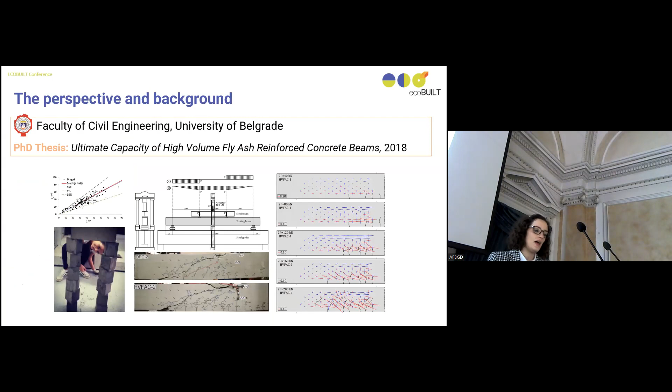Hello everybody, thank you for inviting me to this conference. I'm glad that I will have a chance to discuss this eco-building problem from a different perspective from all of you. As you've heard, I'm an assistant professor in concrete structures. So most of my work is dedicated toward research of the alternatives to traditional concretes on one part, and from another side, I'm also a designer of traditional concrete structures. So that's the perspective from which I will be speaking today.

Construction industry is under great pressure to reduce its environmental effect, and it's accounted for approximately 40% of total climate change impact. That is mostly due to a large consumption of energy and raw materials needed for its processes, but also due to the production of great amounts of carbon dioxide emissions and emissions of other greenhouse gases, and also the generation of large quantities of waste.

If you look at the CO2 emissions for, for example, one building, they come from all the stages of that building's life. So we calculate the total CO2 emissions from the production of all raw materials needed for building that structure, transport of those materials, the construction phase, the use of a building, and materials needed for maintenance, for repair, and other jobs, but also for the energy and water operations taking place in that object.

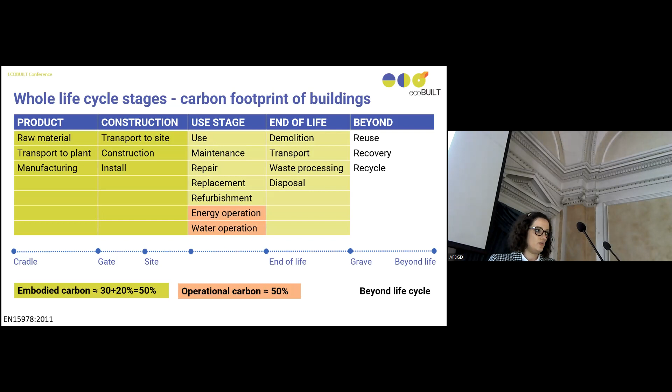So these CO2 emissions can be divided into embodied carbon, the carbon footprint associated with the production of materials, transport, and the production of those materials, and operational carbon, the carbon footprint associated with, for example, heating, cooling, or other energy and water operations in those buildings.

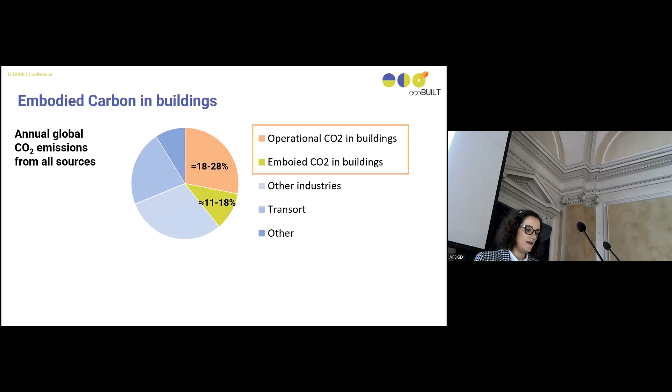So if we look at the global annual production of CO2 emissions from all sources, around 40% comes from the construction industry, and is divided into these two categories of carbon footprint.

If we look at the different sources and different types of objects, the distribution of this carbon footprint between operational and embodied CO2 is different. Those are some estimations, but the general trend is that innovation and changes being made in operational carbon footprint in the last couple of years are much faster compared to changes

being made in the production of materials. So we can assume that total CO2 associated with the construction industry can be equally divided between operational and embodied CO2 in buildings. This means the embodied CO2 part is really significant, mostly attributed to the production of structure or exterior and interior of buildings, with the largest part connected to the production of the structural part of a building.

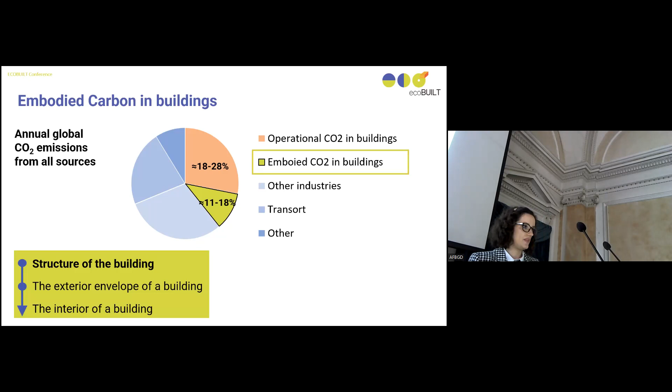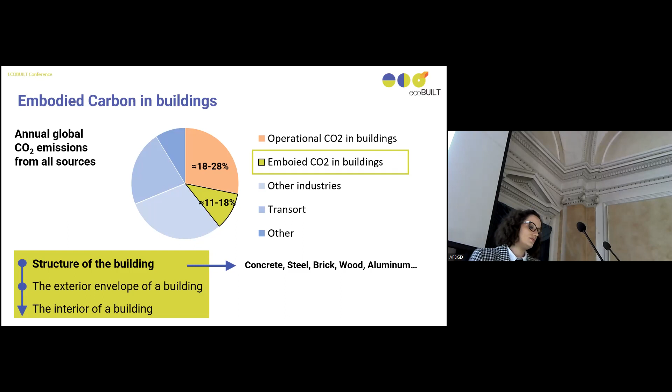When we talk about the structural part, we mostly think about commonly used construction materials like concrete, steel, aluminum, and so on. We can say without doubt that concrete is the most widely used construction material, so that's why the rest of this presentation will be dedicated toward concrete. But also, this is my field of expertise, so that's another reason.

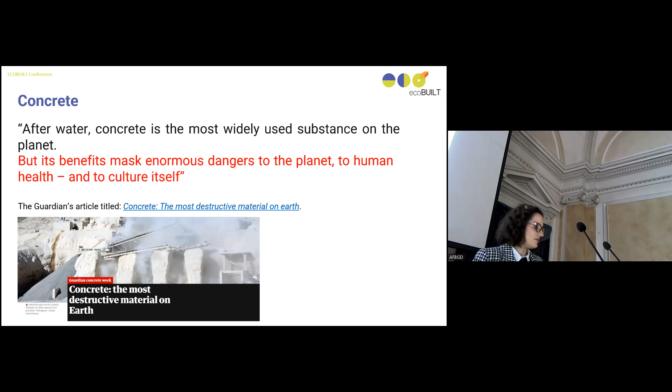You've probably heard that after water, concrete is the most widely used construction material on the planet, but its benefits mask an enormous danger to the planet, to human health, and to culture itself, as stated in a Guardian article and many other podcasts and media. This reflects the great pressure on the concrete industry to reduce its negative environmental effect.

But it wouldn't be fair to look at this negative effect without acknowledging that concrete is one of the main actors that actually enabled the human development we face today, the speed and extent of that development. So it's important to look at both benefits and recognize main problems so we can continue forward in a sustainable manner.

So what is the problem with concrete? The main problem is that it's being used in large quantities. There is probably not a single construction project on Earth today done without the use of concrete. But if we look around, concrete is now present in many other forms.

We are actually trying to produce concrete to build on Mars also. So as we can see, the future of concrete consumption will be even greater compared to today. This is really important because if we compare 1 cubic meter or 1 kilo of concrete to steel or aluminum, concrete wouldn't be the most dangerous one. For example, the production of aluminum is really energy and CO2 intensive.

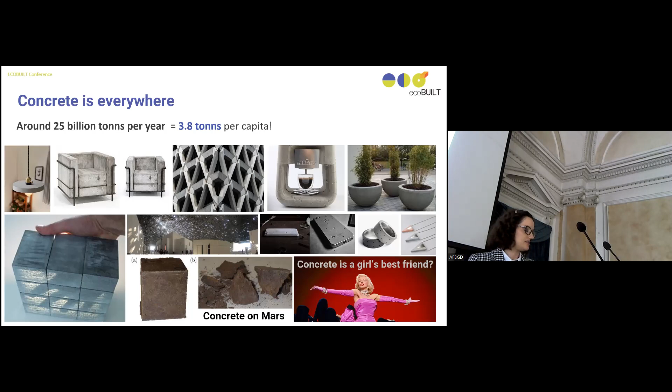But concrete is used in much greater amplitudes compared to those materials, and that is why its negative effects are really big. Aside from great consumption, maybe the main problems with concrete are the CO2 emissions that come mostly from cement, great use of natural resources like natural stone, and great quantities of waste generated after the end of life of buildings.

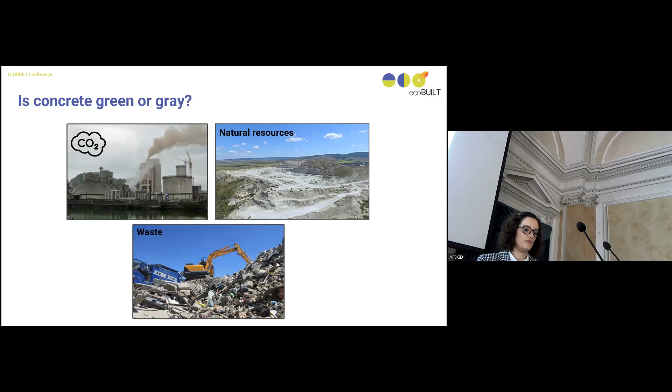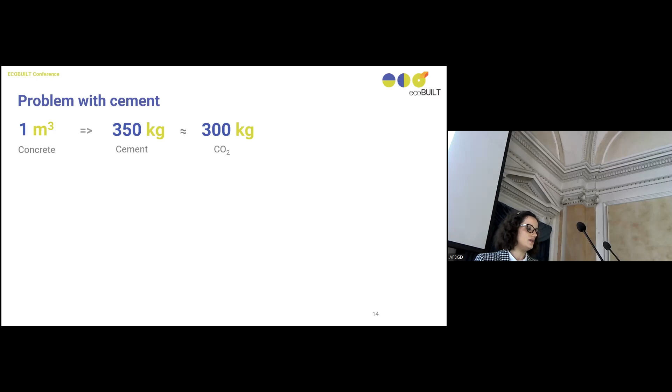The main problem with cement is that we can approximately say the production of 1 kilo of cement is equal to the production of 1 kilo of CO2. So cement production emits a large amount of CO2. For the production of 1 cubic meter of concrete, we need around 350 kilos of cement. So we can see that 1 cubic meter of concrete actually has a large CO2 impact.

And if we know there are large quantities of concrete used around the world, and that cement application is greater than the application of concrete - we use cement for soil stabilization, to produce different types of glues and mortars - it is no surprise that cement itself is responsible for around 10% of total CO2 emissions globally.

Where does the CO2 come from? If we look at this chart or scheme of cement production, we have two main issues. To produce cement, we need to heat limestone and other materials to produce Portland cement, the cement clinker. During that chemical reaction, heating at really high temperatures the calcium carbonate, we get cement clinker as a result, and we get CO2.

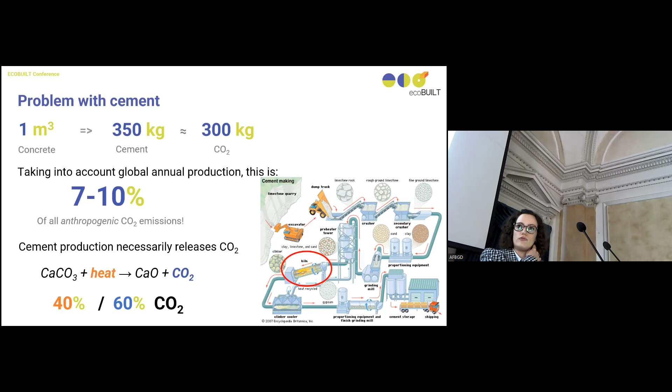This chemical reaction cannot, at least for now, be performed without CO2 being emitted into the atmosphere. It's estimated that around 40% of total CO2 emissions from cement come from the energy needed to heat the limestone, and 60% comes from the chemical reaction itself. This is a kiln, the part of the process where this chemical reaction takes place, which is why it's targeted as the critical point for reducing CO2 emissions.

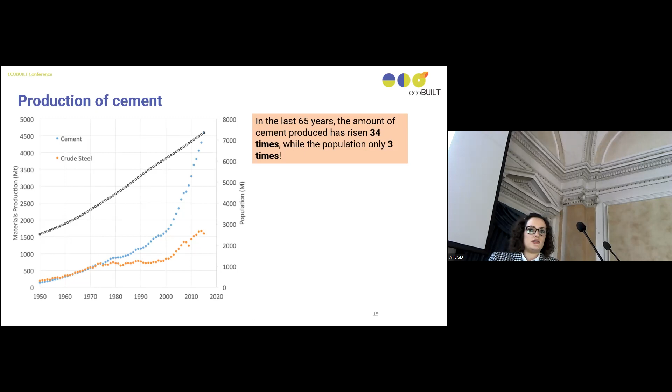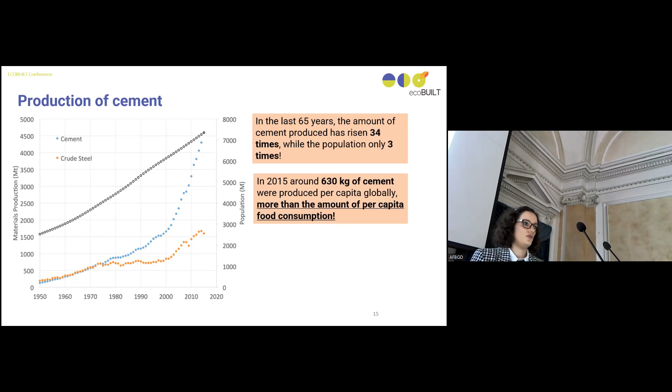Aside from this, cement production has been rising throughout the years, at a much faster rate compared to population growth. In the last 65 years, cement production has risen 34 times, around 10 times higher than the growth of the population on Earth. For example, in 2015, more kilos of cement per capita were produced globally than consumed food per capita that year. If we look at this growth, we can see it's exponential, and I'm afraid it's not going to change anytime soon.

So we have all this problem associated with cement. There are a lot of strategies being implemented to try to reduce this negative effect.

Some strategies are used to reduce the chemical part, and they are mostly oriented toward using less amount of cement, using cement in a more efficient way, or replacing cement with some other adequate material.

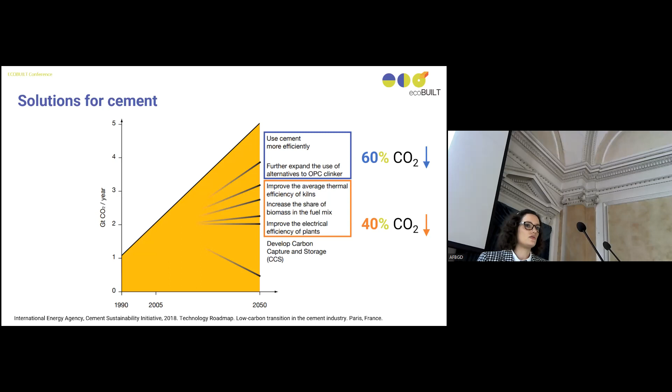Other actions are oriented toward making the process of cement production more energy efficient. One way to reduce the negative effect of cement production, which is relatively simple and relatively cheap, is to use so-called supplementary cementitious materials, mostly byproducts from different industries, to replace cement partially or totally in concrete.

The most commonly used materials are fly ash, a byproduct from thermal power plants, slag, a byproduct from steel production, or red mud, which comes from the production of aluminum.

These materials are used to partially replace cement in concrete, and they are actually part of the cement that we buy today. So when we say cement, it's not 100% Portland cement like it was when first introduced to the market, but now it has some percentages of these materials, with the idea to reduce the amount of cement being used.

Another way is to completely eliminate cement, which can be done in so-called alkali activated concrete or geopolymer concrete. This is basically concrete made from one or a combination of these materials, which can be activated not only by water, but by water in combination with alkaline solutions that have a really high pH.

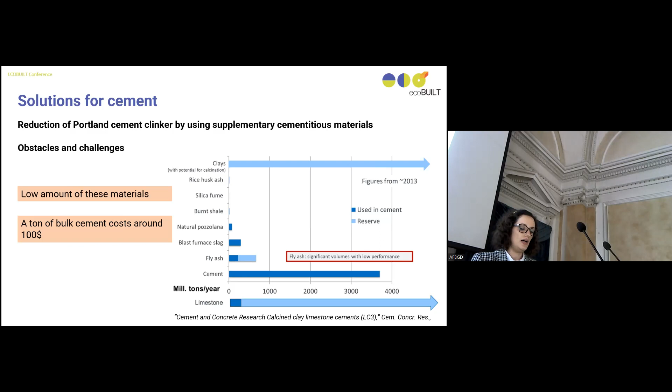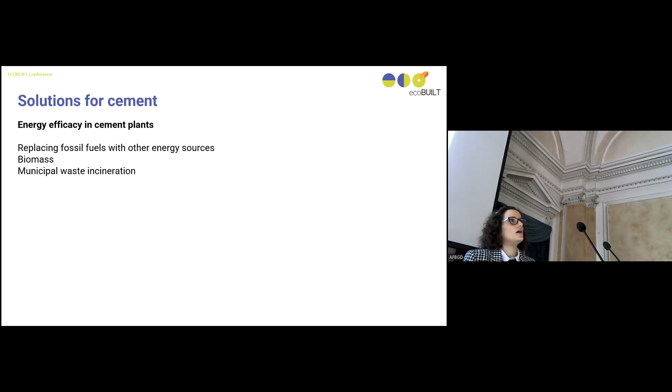Another way to reduce the negative effect of cement production on the environment is to reduce that 40% CO2 part. This is done by making the process of cement production more energy efficient, and by replacing fossil fuels with alternative energy sources. For example, in Serbia, most cement plants use incineration of municipal waste to replace part of the energy source in their production.

There is one popular technology now being researched and tested: CO2 capture and storage. The idea is to capture the CO2 where it emits in kilns, in this case of cement, to transform that CO2 from gas to liquid, for example, and then store it in containers or in another safe way, underground or underwater.

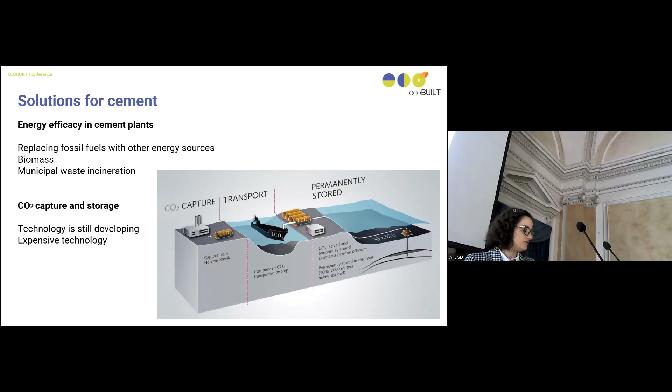This seems like an efficient way to eliminate CO2 from the atmosphere, but this technology is currently really expensive and energy intensive, so a lot of energy is needed to transform gas to liquid. There is still a lot of research needed for this technology to find its way into practice.

The second, let's say the biggest problem with concrete, is the large quantities of natural resources used for its production. Approximately three-quarters of concrete actually comes from stone, so large quantities of concrete need large quantities of stone.

That natural stone comes mostly from rivers, from riverbeds, or from quarries. And if we use that large quantity, there is a big problem with changing the environment and affecting the microclimate and biodiversity in those regions.

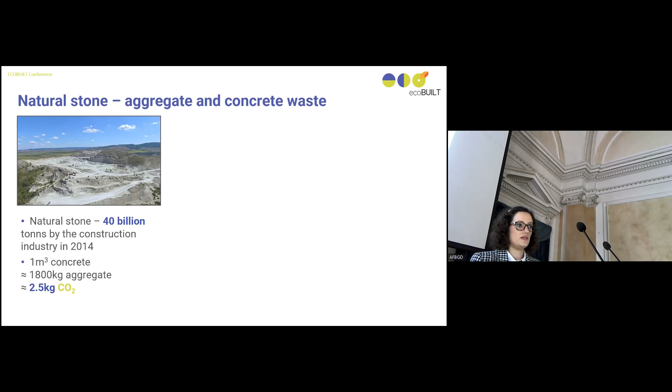One of the efficient ways to reduce the use of natural resources is the use of recycled ones. So it would be logical to use recycled concrete as a partial or total replacement for natural stone, especially since construction and demolition waste is around 30% of total waste, and concrete is half of that portion. These great quantities come from construction, maintenance, repair, and mostly demolition of buildings.

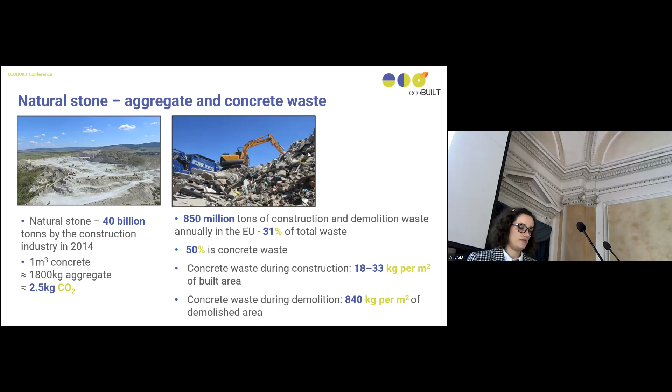Research and practice have already shown that it is possible to replace up to 100% of coarse aggregate in concrete with recycled concrete aggregate. This is being done moderately, in applications where some moderate properties are needed. So it's mostly used in construction of residential or commercial buildings, but also in layers of roads or other infrastructure objects.

So how does this grain of recycled concrete aggregate look like? As you can see, it's actually crushed concrete, and one grain of recycled concrete aggregate consists of part natural stone and part cement mortar. So it has different properties compared to natural stone, of course.

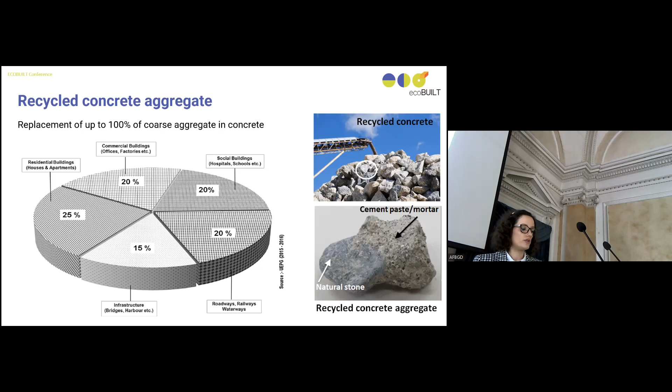It is inferior to natural stone. It has a lower modulus of elasticity, lower strength, higher porosity, creep, and shrinkage. But these inferiorities are not something that eliminates this material from practical use. It is only important to know all these properties so that recycled concrete aggregate can be adequately used.

What are some of the obstacles here? First of all, if we want to use recycled concrete aggregate, we need a place where we can buy it or obtain it. In many countries, there is a lack of recycling strategies and markets. In this figure, the gray bars show the percentage of recycling of concrete in different countries.

There are a lot of European or global strategies and initiatives that require recycling of some amount of waste, but they are not being followed in many countries. Aside from that, if we have a low price of natural stone, like we have here in Serbia, there is not enough motivation for investors to use recycled concrete aggregate, because recycling can be a really expensive process, and recycled concrete aggregate can have a higher price compared to natural stone.

So it is important to have state or local strategies that motivate the use of recycling, that give subventions to recycling companies in order to make an adequate market for it.

There are also some technical unknowns, but the codes and standards we have for design actually recognize recycled concrete aggregate and allow, explain, or define the use of that material in reinforced concrete structures. In some countries, these technical norms are not developed to an adequate extent for practice to use them easily. And like with any other recycled material, there is always a lack of trust in waste or recycled material. Places like this conference and similar events are a place to break that bad chain of lack of trust.

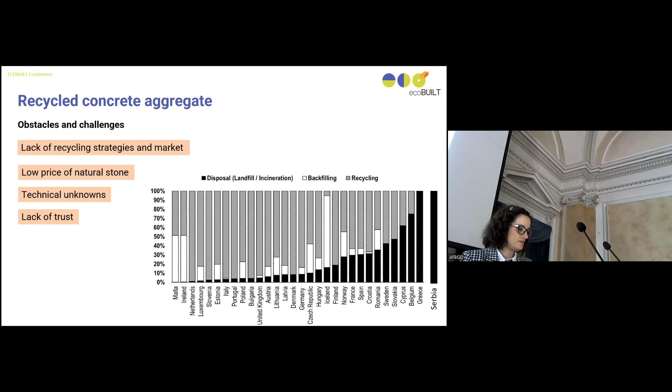At the end, one of the questions asked about concrete is: is it durable or not? It's important to know that we design concrete structures to have a certain service life. They are designed to last 50 or 100 years, depending on the type and importance of the structure. But that doesn't mean the structure will collapse after 50 or 100 years. It just means that in that period there won't be a need for great maintenance or repair, if the structure is maintained regularly and as it should be.

During that period, the formation of cracks is something that is normal. We design the width of those cracks and expect them to form in our structure during the service life. But if the structure is not maintained properly, then durability at that point can become a problem with concrete.

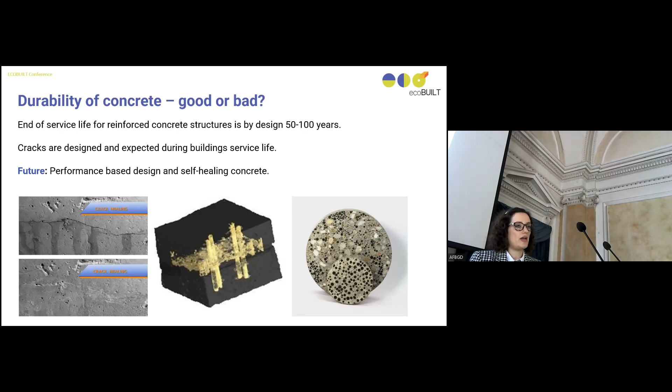Nevertheless, research is going forward, trying to find ways to make concrete even more durable, so that we reduce the amount of waste that will be made. We are now designing structures for specific performance needs, and we are developing self-healing concrete with some agents, some bacteria in concrete, that can actually repair those cracks after they form.

So aside from those strategies for making concrete more sustainable, we also try to optimize our structures, optimize by design, by using, for example, pre-stressing, by analyzing loads in a more detailed manner. So the idea is to use as less material as possible. We are trying to make our construction site or processes more efficient.

We use 3D printing technologies because 3D printing allows us to actually eliminate the formwork, and we can make really optimized shapes and structures if we use 3D printing.

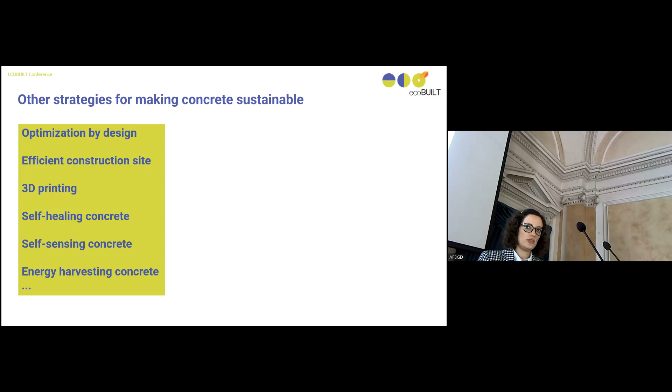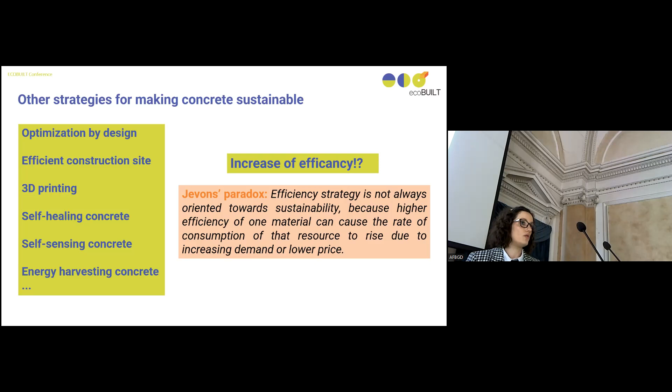We have self-healing or self-sensing concrete. So we are trying from different perspectives to make concrete as efficient as it can be, which is from one side a good strategy, but we should also be careful, because an efficiency strategy is not always oriented towards sustainability. And if we succeed in making concrete a really efficient material, then investors will use that material more, and maybe we will actually end up with a higher usage of concrete when it is more efficient.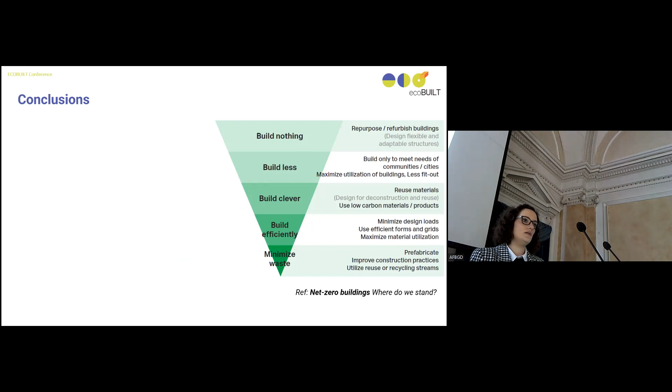Because of that, the real fundamental strategy that we need to apply to make concrete sustainable is actually to build nothing. So to try to use or repurpose the objects that we have, to build only to meet the needs of the communities, because there are a lot of examples in China, for example, a lot of cities that are made mostly of concrete and are completely abandoned, or a lot of structures that are not finished because of economic crisis or something like that. So we must admit that nowadays we don't build only for the needs of the community, but for some other purpose. So building efficiently and all these strategies that I told you about are something that we need to do at the end and not at the beginning of this sustainability journey.

So I think that for any material to be sustainable, we need to have fundamental knowledge about its properties and processes related to that material, so that we can actually make specific tailor-made strategies for each project, looking from the beginning of the project, from the design to beyond the end-of-life phase, in order to have a sustainable project and sustainable material. And in this manner, it is extremely important to have knowledge about systematic sustainability analysis for eco-evaluation, to avoid wrong conclusions, misleading results, or any other greenwashing that is present. And in order to do so, we need to adopt adequate methodology for this analysis.

For example, if we talk about concrete and we want to compare two different types of concrete, or a concrete structure to a structure made from a different material, we actually need to look at structures that have the same bearing capacity, the same serviceability, the same durability, and the same fire resistance for proper comparison. Only then can we actually choose the best solution for each project. Thank you for your attention.

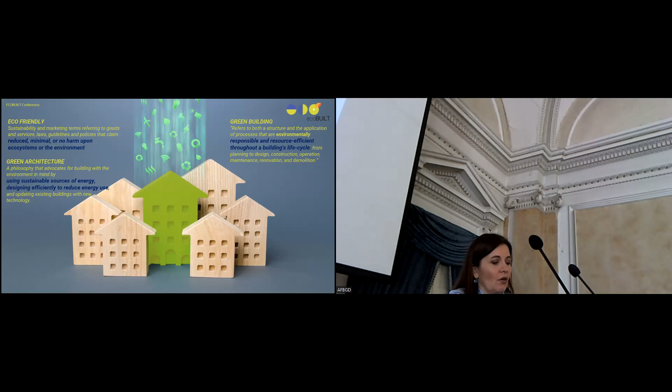If we go back to the definitions of eco-friendly, green architecture, green building, we will find several common points: no harm upon environment, using sustainable sources of energy, reduced energy use, and finally, resource efficiency through the whole life of the building.

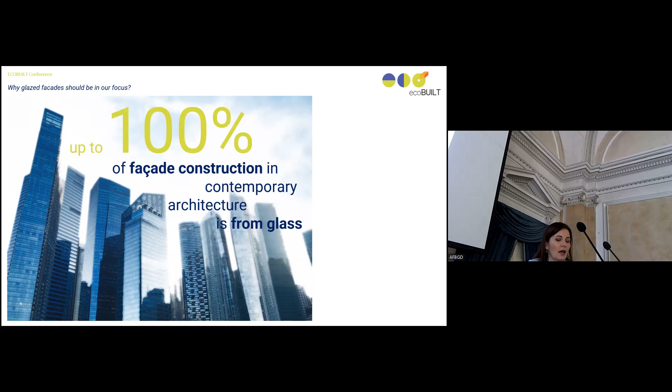Taking into consideration those points, why should glass facades be in focus for us? Because in contemporary architecture, up to 100% of facades are from glass or can be of glass. Why are buildings in our focus? Because 90% of the time we are spending in buildings. And additionally, up to 40% of all material and energy consumption is connected with buildings.

So what we, people who are designing the buildings, and as part of that designing the glass facades, should do, what should be our goals? Our goals should be to build 100% comfortable, safe, and energy efficient buildings, and at the same time with minimal possible use of materials or harm upon the environment. Taking into consideration all that is said before, we can conclude that glass facades have 100% important potential for green, ecological, and sustainable constructions.

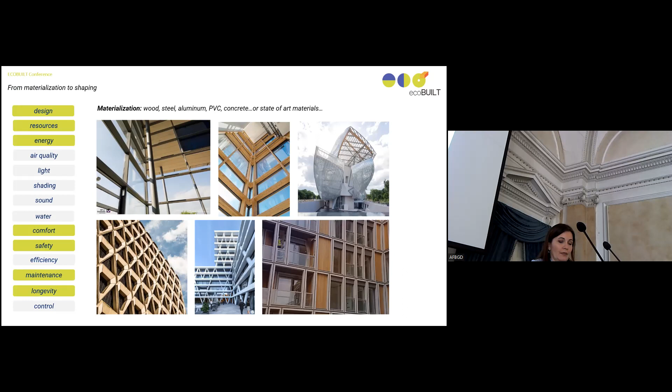The next step in designing the facade is definitely shaping. Shaping is something which can bring us a lot of tools for influencing important factors for sustainable construction. We can choose simple shapes or the most complicated parametric shapes, which of course will give us much more tools for influencing important factors. Let's go one step forward and think about greenery or greenhouses on the facade, which can influence some other factors.

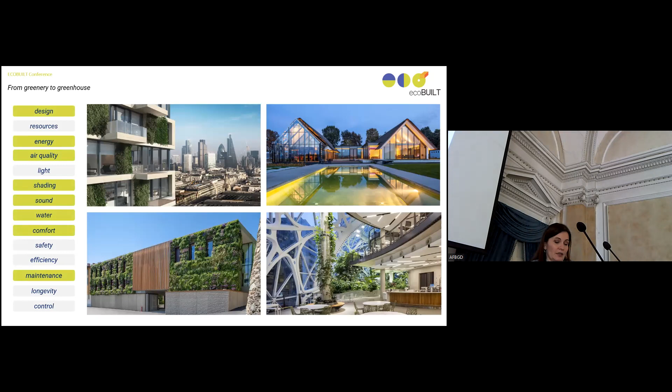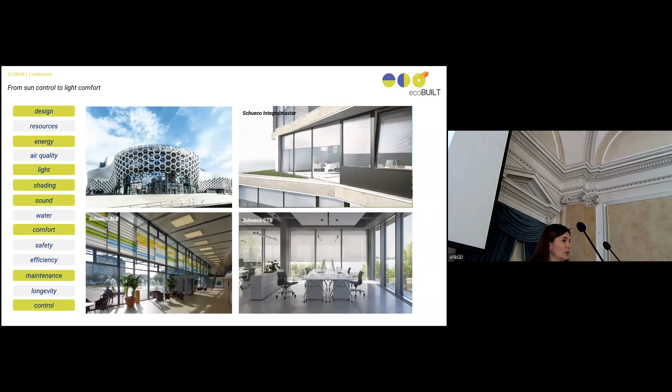Also, designing sun control or light comfort on the building, we can influence many more factors connected with sustainable construction. And finally, the most complicated and most influential part of designing the facade is to choose the type of building scheme. Building scheme can be mono or multi in many ways. Speaking about mono or multi, we're speaking about layers, functions, efficiency, etc.

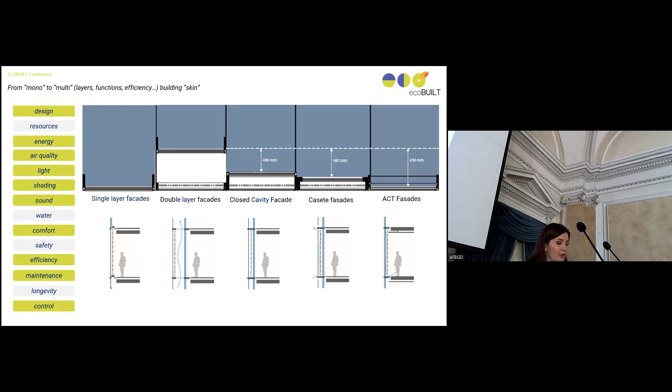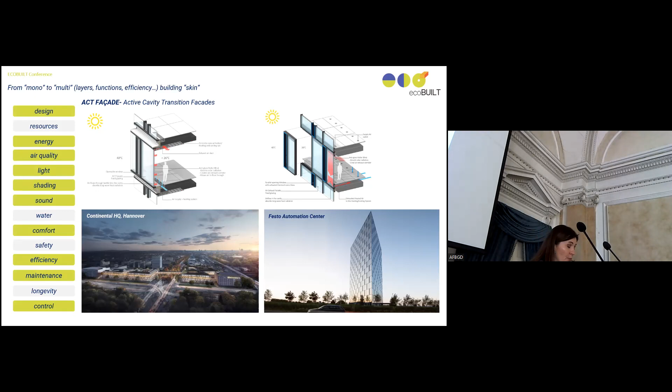Those facades work together with the building and make an active scheme. Designing this facade, we have a lot of tools with which we can influence important factors, factors important for the level of green and sustainable architecture.

The next group of potentials in a glass facade is definitely connected with potentials in products. So after we finish the phase of shaping our facade, we should choose products from which we will materialize our facade. Choosing the type of products, we are actually choosing the material and function. We can use or choose separate products connected with the facade, like ventilation elements, sun or glare shading, or we can choose a more complicated system combined from different products.

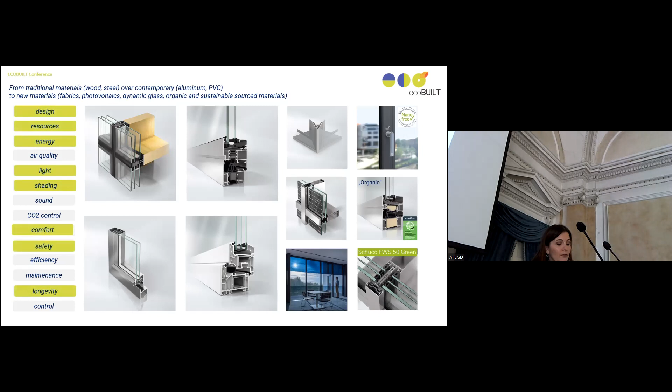The first step is definitely to choose the material of our products. We can take traditional materials like wood or steel, or contemporary materials, which today are aluminum and PVC. But we should not forget new materials like fabrics, photovoltaics, dynamic glass, organic and sustainable source materials. Choosing material, we can influence the following factors connected with sustainable construction.

The next step is definitely choosing a function, products with specific functions. Some products are referring to savings. Some products are focused on protections, different kinds of protection. Some products are oriented to production - we are speaking about producing electricity with photovoltaics. And we have a group of products connected with controlling systems. With choosing specific products, we can influence all factors important for eco-friendly, green, or sustainable architecture.

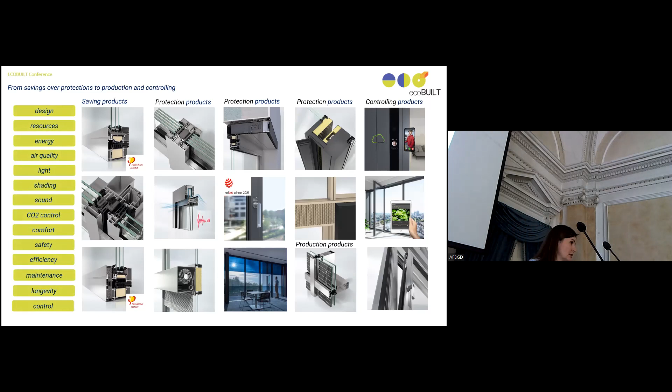Also, choosing the products, we can choose just one single product with sustainable orientation, or we can choose a combination of products or really complicated products working all together, bringing influence on important factors for sustainability.

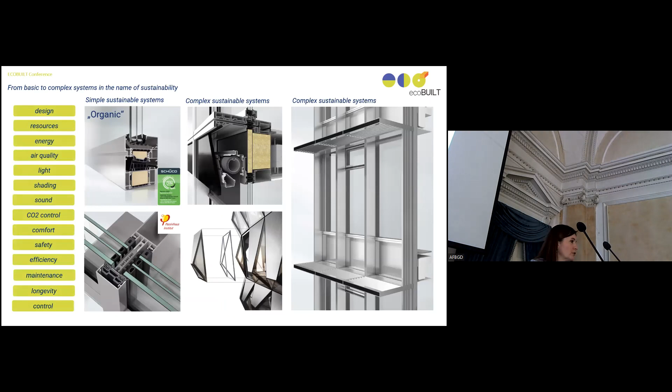The next group of potentials connected with the glass facade lies in standardization and certification. Speaking about national standards and legislation, they establish politically and socially acceptable minimums. So as people from the practice, we should point out the importance of green standards, which establish a higher, or let's say different, level of contribution to green and sustainable architecture.

In green standards, we separate green building standards, green codes, green product certificates, and green building rating and certification systems. They give us tools for influence on different lists of important things connected with eco building and sustainable construction. This list consists of some new topics like ecological footprint, VOC controlling, lifetime and reuse, innovation and management.

Of course, the first step is to start with product certifications. There are a lot of certificates referring to materials used in glass facades. Product certificates in glass facades can refer to energy, wood products, insulation, material quality, safety, lifetime, recyclability, controlling of VOC usage, air quality, and products for building operation and maintenance.

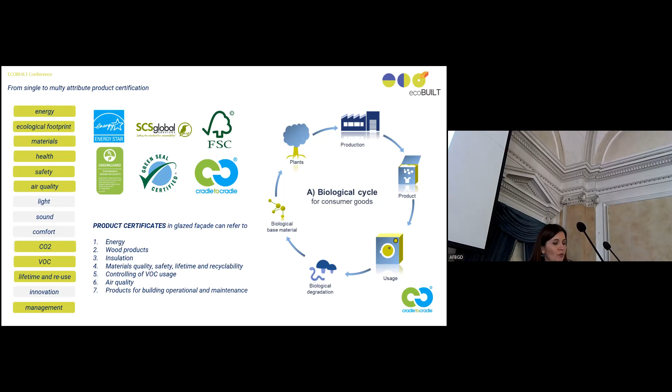Maybe the most difficult certification approach is the cradle-to-cradle kind of certification. This picture actually shows us what is the role model for cradle-to-cradle sustainable concepts.

Cradle-to-cradle concept means exactly taking material from nature, using as little energy as possible during production, and decreasing as much as possible the emission of harming materials. After the life cycle of a material or system is finished, it should be recycled and sent back to nature to use in a new cycle.

This is really difficult, but some products from my company have this cradle-to-cradle certification. Besides certification connected with products, building certification and rating is really important because it broadens the focus beyond products to consider the project as a whole.

We all know several different building certification systems like DGNB, LEED, BREEAM, OGNI. All of them include 7 common components of green building: energy efficiency, water efficiency, green sustainable materials, waste reduction, indoor air quality, community, and commissioning.

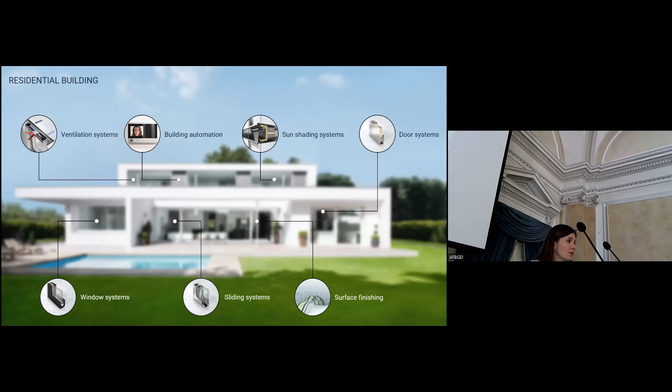Certification systems can give us tools with which we can influence factors important for sustainable construction. Working on residential buildings, we can influence through certification several groups of products and elements, also in office buildings. The final set of potentials connected with glass facades is social responsibility, connected with social responsibility and conscience of the participants in the process of design, producing, or installation of glass facades.

Our company stands behind a 360 degree sustainable approach from design to the end of the building life cycle, meaning that all participants in the process of designing, production, and investing of facades should be included and can take part in sustainable construction.

With this approach, we can actually influence the following factors connected with green architecture. On the example of our Schüco company and our products, I can show you what can actually be approached by every participant in the process of producing and designing glass facades.

Schüco company, for example, decreased CO2 emissions over 3 years by 60%, with the idea to decrease this by an additional 30% until 2025, and to bring it to zero by 2040.

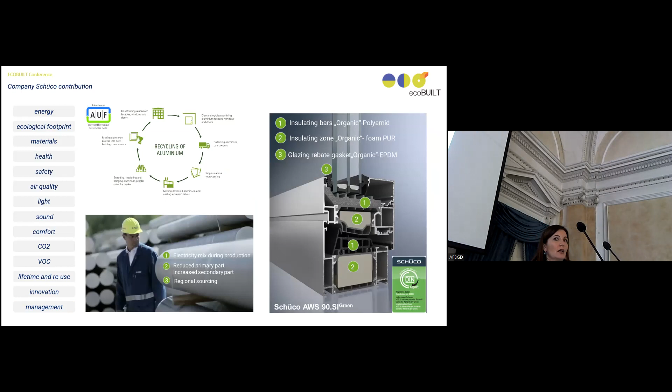Additionally, we are using much more recyclable materials in our products, and also organic products. We find a way to use organic products in our final products. A lot of changes have been made in the process of making aluminum constructions or facade construction, because this process is really energy-intensive and heavy with CO2 emissions.

Finally, we participate intensively in certifications - this is really important, certification of materials, and also participation in the certification of whole buildings. And finally, a management approach, using software which helps us control the whole process of management in the implementation of facades.

I would finish this presentation with the following words. The Mayor of New York said that we will introduce legislation to ban those glass and steel skyscrapers that have contributed so much to global warming - they no longer have a place in our city or on our earth. We, as professionals, should do something different. Let's make eco-friendly clever, not radical.

Clever, with having in mind what potentials we can influence and which tools we can find to influence these potentials. So our mission is to use state-of-the-art technology with a focus on humans and nature. Thank you for your attention.

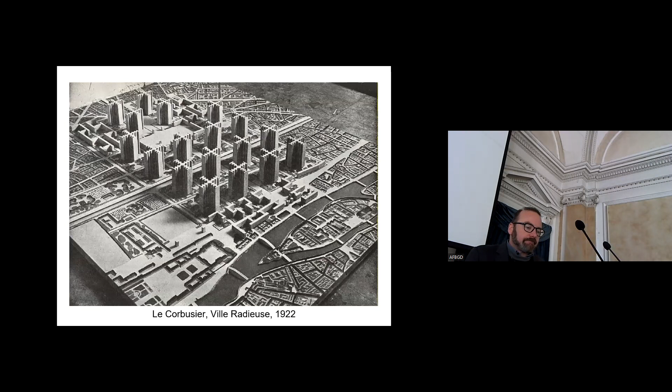But on another side, if there were many occasions in which planning was very important for our discipline, nowadays planning at a very big scale is not so common anymore.

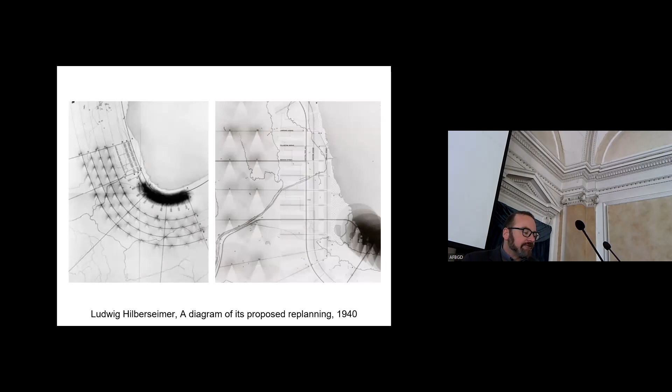I just take some examples to remind you of things like the planning of Hilberseimer in the US, the new city, a kind of development of cities that was also related to the possibility of an atomic war, considering that an atomic disaster could affect as little population as possible.

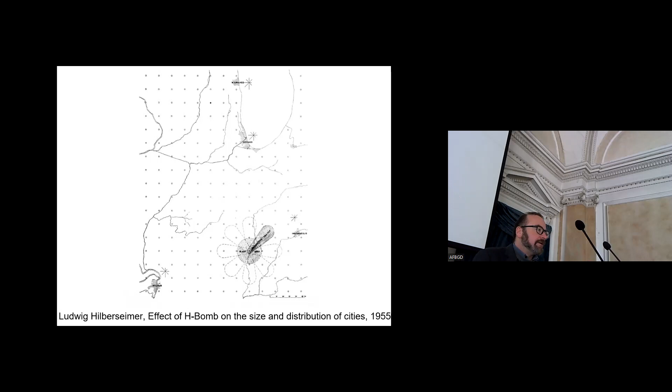Here it's possible to see how a bomb affects those points, a kind of living spread out inside the country that is less affected by a nuclear war. Something very typical of that period too.

Another kind of planning on a big scale we can find in Italy, for example, in Saverio Muratori's work, Civiltà e Territorio. But you can find in each country many different architects who, after the Second World War, worked on planning of a region or a nation.

That's just an example of that. Think about your own country, and I think you can find ideas and proposals at this scale, the huge scale of a region, of a nation.

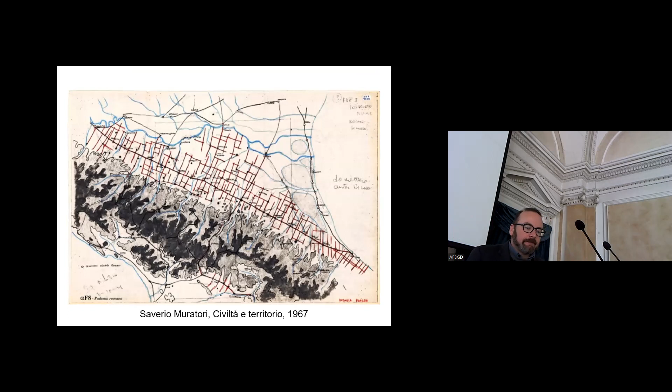Ecology, on the other side, seems difficult nowadays, both for architecture but mostly for sustainability, to think at this huge scale. But it's something that was very typical for our job.

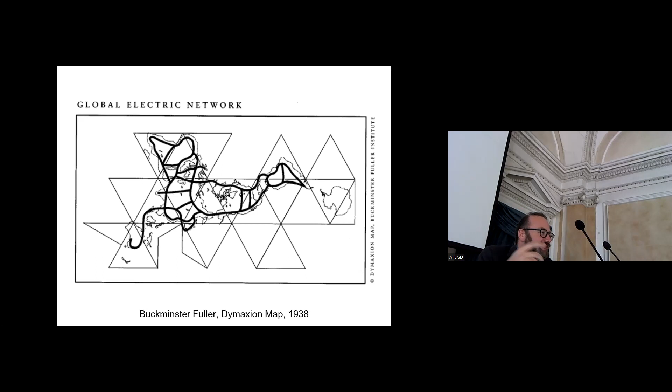Something already shared a bit later, one century later, is the idea of Buckminster Fuller of a connection between different countries. This is a map of the world, a bit different from the one we see normally, with black lines representing connections of energy, because Fuller's idea was: if it's night here, the sun is somewhere else, and we can bring energy across our world to supply it from one side to the other.

And Buckminster Fuller developed this idea both at this huge global scale and at a very small scale, like in the Dymaxion house of '32, with all those engines for water consumption and so on.

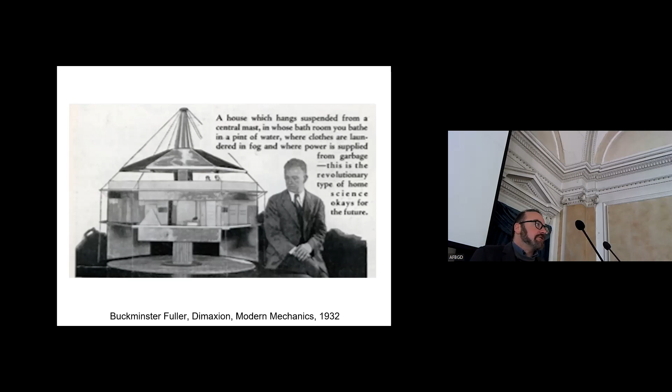But nowadays, confronting sustainability at this huge scale is something that happens very rarely. I'm not here to tell you about a solution, but just to give you some examples and, I think, a direction that should be part of the job of an architect.

I'll take one example: the research developed by OMA AMO in 2010, Europe Roadmap 2050, which divides Europe not by countries but into potential places for developing different kinds of energy. The scale of solving the energy problem of a nation is different from the scale of solving the energy problem of a house.

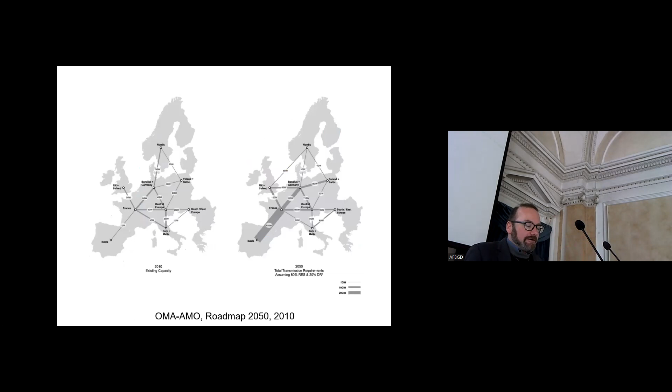Of course those images might be a bit naive, but for me they give you an idea, something that is part of the job of an architect, to give this vision and visualize how our life, our city, our nations will be in the case we produce all our energy from sustainable resources - geothermia and islands of wind.

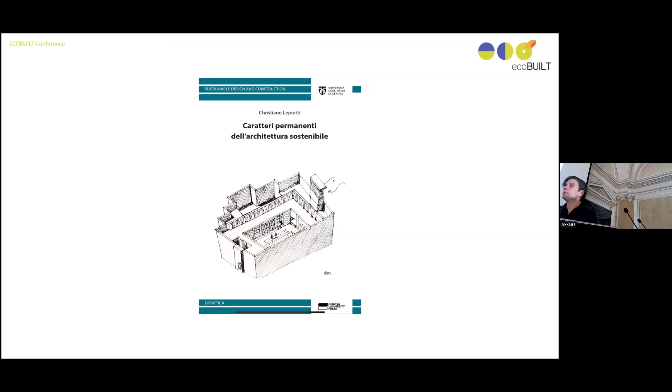My thought and research on the topic of sustainability began actually 20 years ago in Germany, in Darmstadt, with Günter Pfeifer. He's a professor and architect from Freiburg, and this is expressed in this monographic book - unfortunately, or fortunately for you, it's only in Italian, but I'm working on a new edition in English. The state of the art of my research and the outcomes of my reflection are collected in this book.

The thoughts are mainly about the profile of the architect and the relationship between the profile of the architect and the profile of the engineer, and between architecture and construction. The idea of the book is simple, very simple: namely that one aspect of sustainability, the relationship between architectural form and climate, is an integral and essential part of the history of construction and of architecture, obviously, as a discipline.

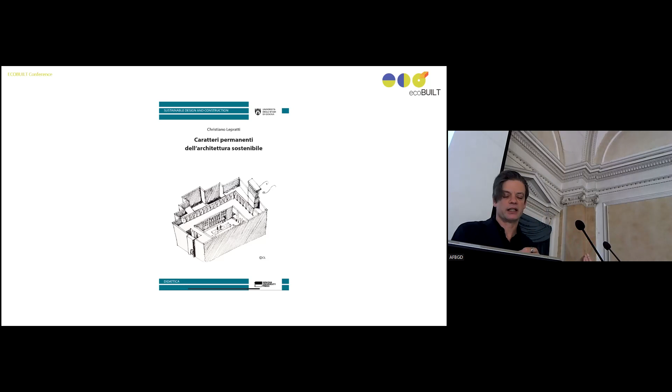Like the case with the temple transition from the wooden to the stone structure: wooden structure is vernacular architecture, the stone structure is architecture. And vernacular construction - but we have to think with a different point of view, and equivalence between climate problem is equal to architecture itself.

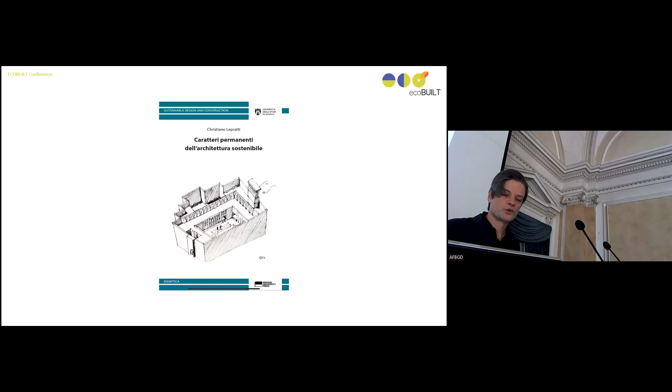To demonstrate this concept, I can start with... no, this is not more interesting. Okay. Bruno Taut, a German architect.

The most recent history of 20th century architecture has addressed sustainability issues in the discussion of hygienism, a crucial theme of urban design in light of the consequences of the urbanization phenomena induced by the Industrial Revolution. The German theories of Licht, Luft und Sonne - light, air, and sun - and the French theories of the Ville Radieuse hinge on the theme of hygienism.

But in the first decades of the last century, by a number of masters, the focus is on the design of the individual architectural artifact, determining a mode retrospectively traceable to a kind of proto-environmentalism.

Along with the very early Frank Lloyd Wright of Jacob's House number 1, 1937, and the later Le Corbusier of Villa Shodhan, 1956, one of the figures at the forefront of design and theorizing was Bruno Taut.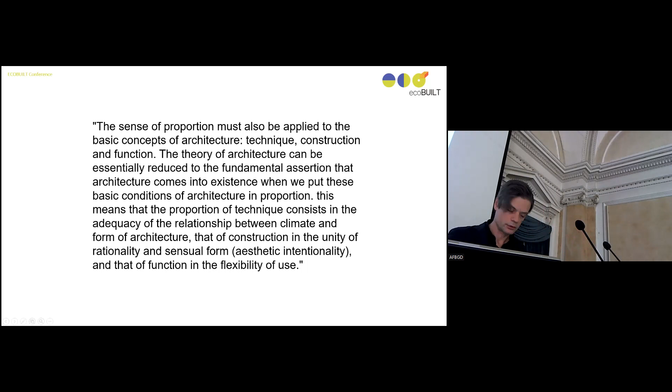Architectural form cannot be forced into a style. The position of Taut was very critical of the international style, or the style developed or designed by the colleagues.

Climate defines the architectural form, and he tried to explain this concept with this kind of sketch. Since climate is everywhere different, the forms of climate architecture can only ever be different.

This is another intelligent way to stress this idea: the proportions are also different. This is the reason why we have not only just one Vitruvian man, but different ones depending on the latitude or the geographical side.

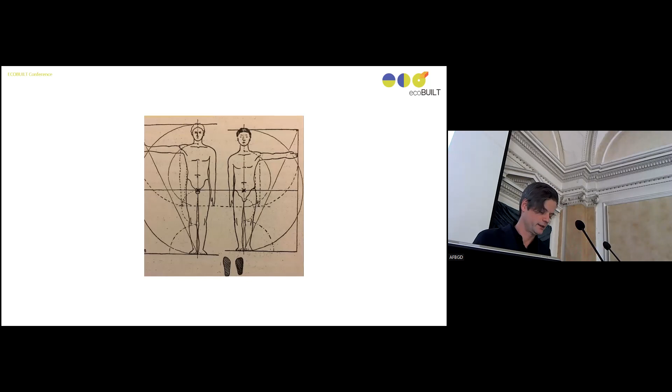Another try to quote Bruno Taut - and this is really interesting, because it's dealing with the relationship between architecture and technique. Nowadays, this is a big, important aspect, I think, also to define our profile as architects and to define the profile of the architects of the future.

Technology in the field of architecture wants to equip the house with appliances, protections, special materials, and installations that allow the kind of house to be used anywhere. 1937. Thus, the house is taken out of the hands of the architects and handed over to those of the engineer.

The same results are produced as with machines, which everywhere on Earth operate with the same form and characteristics. The result is world architecture, the international style.

The many modern buildings these days are illustrated in architectural magazines. If the place or region where they were built were not indicated under the photographs, no one would be in a position to tell whether they are in Turkey, Germany, France, England, America, Japan, or Russia.

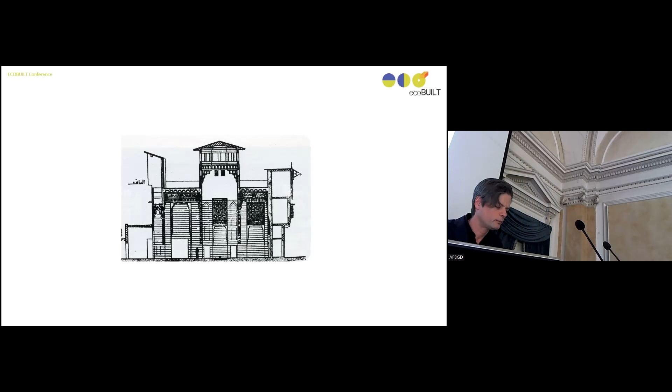This guy is an Egyptian architect, Hassan Fathy. He built a lot for rich people, and with the fees, he supported economically housing for poor people. This is one architecture from Hassan Fathy, showing the relationship between the movement of the air, the cross ventilation inside of the building, and the shape of the building.

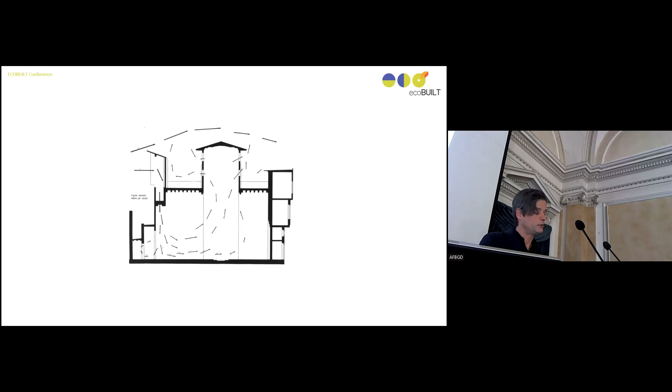The architecture in this case is generated by a kind of diagram of the movement of the air inside of the building, like this one.

Now we have technologies and software which are actually able to simulate the behaviors of the air and water inside of buildings.

And now a statement: I think we have to think global and build social, using technology to improve the quality of life, not necessarily like Hassan Fathy, who built for the rich to finance homes for the poor, but using technologies that don't feed the research market for research, that don't produce dependence on new materials, but serve to build better than it has always been done, with local materials and a lot of intelligence, perhaps augmented by software support.

Thank you for your attention.

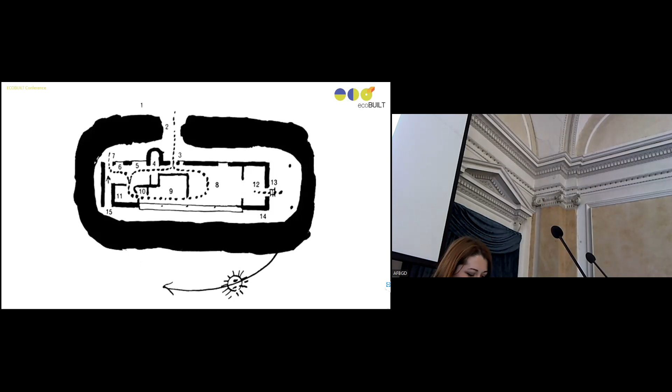Since the years of Vers une architecture, he writes about the importance of light, air, and greenery, which should be visible from the inside of each house. He applies a principle that evolves into what we nowadays call biophilic design, a strategy that takes into account the spontaneous tendency of human beings to feel good when surrounded by nature. It is not hard to imagine why, because our brain is made to function best when in a certain natural habitat.

This principle is applied in his urban plans too, where the view from the windows is always directed to a natural habitat. Le Corbusier also tries to bring a view of nature inside the design, inside the big terraces or basins, like in Maison La Roche or Villa Savoye. The importance of nature in his projects has also been studied by scholars, who already saw in his 5 points of modern architecture a strategy for dealing with nature, environment and context. This principle remained throughout his whole career.

The connection with nature is so important that when Le Corbusier visits the United States in 1935, he is shocked by the lack of greenery and defines the American city as a mighty storm, tornadoes, and cataclysm, absolutely devoid of harmony. He writes this in his book, When the Cathedrals Were White.

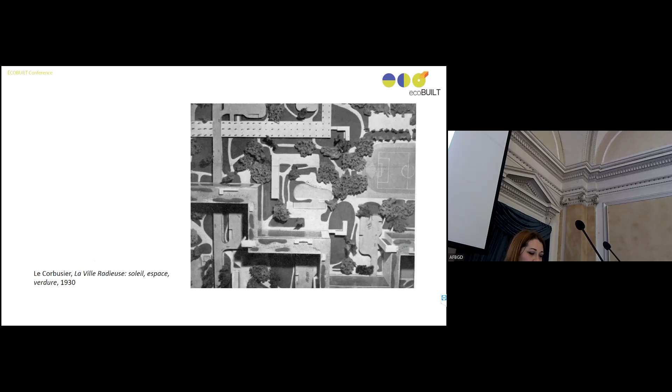He proposes his Cartesian skyscraper, which is an improvement on the normal skyscraper. It is much bigger and can host more people, allowing many families to abandon the suburb and move to the city. The city is very spacious, and each block is divided from the others by a park full of trees and amenities, and nature is brought into houses through large windows.

In 1942, Le Corbusier published Maison des Hommes, in which he took up many of these criticisms, updating them. Here he writes once again about the absurd life in Manhattan, where the economy of capitalism created a dense planning. Every piece of land has been sold.

The prices of houses are very unaffordable for people, who are forced to live far away and cannot afford what he calls loisir, which is like free time and recreational activities. Life, according to him, is not sustainable, and human well-being should not be subordinate to economic rules.

So Le Corbusier here adds an important theme, the social theme, which needs to be involved when we think of ecological and sustainable architecture. The situation seems to have become even worse.

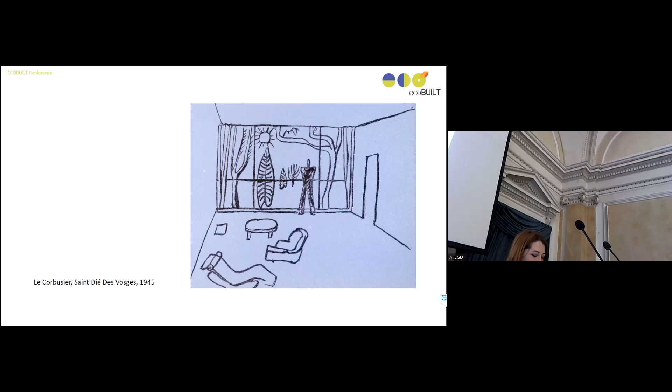In 1945, a citizens' association led by Jean-Jacques Duval asked Le Corbusier to draw up a preliminary plan for the reconstruction of the town. The plan totally breaks with the pre-war configuration of the city, as he did in many other plans. He imagines starting from a tabula rasa, where all the standing buildings are demolished.

The most innovative part of Le Corbusier's plan for Saint-Dié was the city center, which has a large pedestrian square designed as a focal point for the social life of the town, occupying the land on the north bank of the river. In this plaza, Le Corbusier places the town hall, the prefecture committee rooms, and the administrative office.

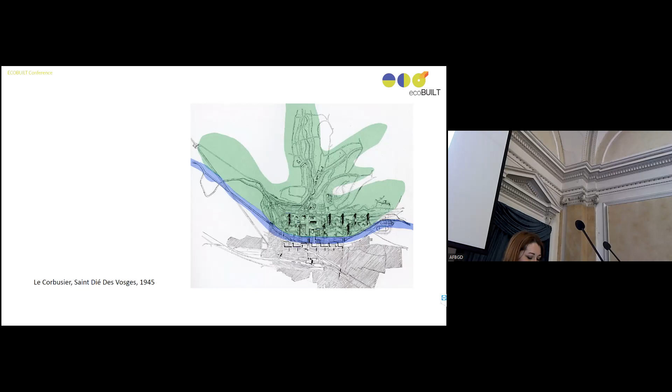Then Le Corbusier places an administrative tower at a great distance from any other building, and its height would give its occupants a clear view over the entire city. So Le Corbusier designed the tower with heavy sunbreaks.